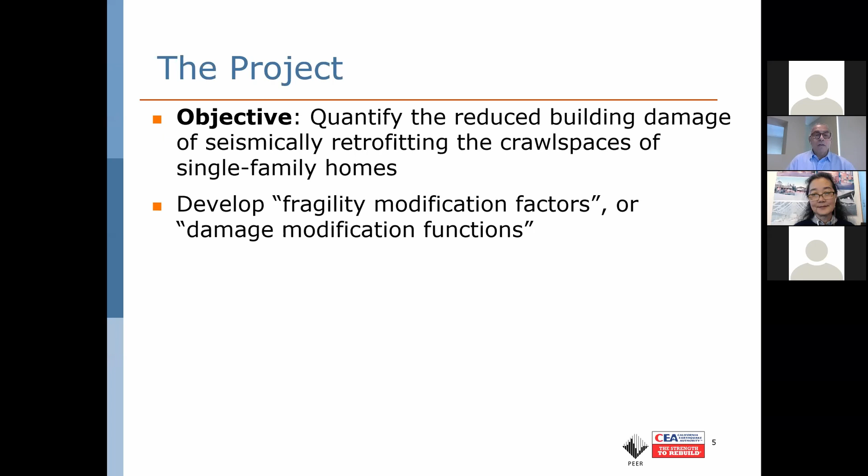The objective of the project, in a simple way, is: if you have a deficient single family home in terms of crawl space and cripple wall, and you retrofit that, how much are you really reducing the damage to your building? In other words, to get a little more scientific, what is the fragility modification factor or damage modification function? If you retrofit your deficient single family home in terms of cripple wall, what do you really gain after the earthquake in terms of damage?

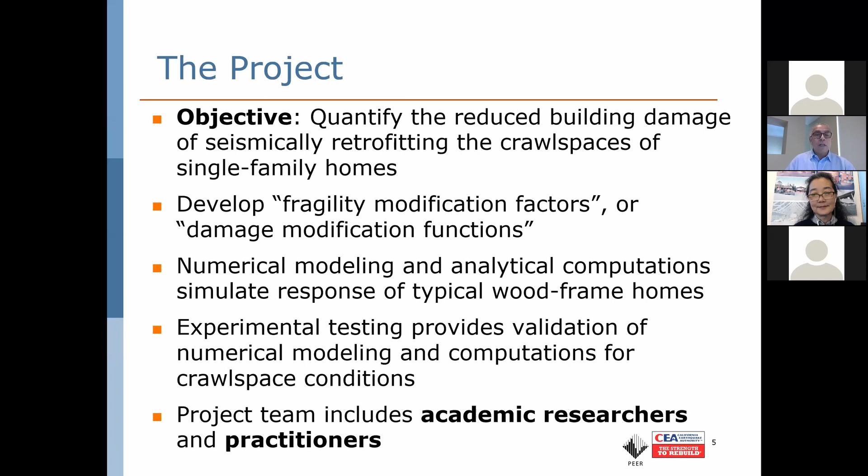The project involved, as you will see today and tomorrow, major numerical modeling and simulations by various groups, led by Stanford colleagues, and lots of experimental testing at different places to validate the simulation results, which I'm going to say a few words about, and you will hear more about later today.

This is the org chart of the project. You don't have to read it. The only thing I want to emphasize is that many people were involved, both at the junior researcher level, senior researcher level, as well as practitioners.

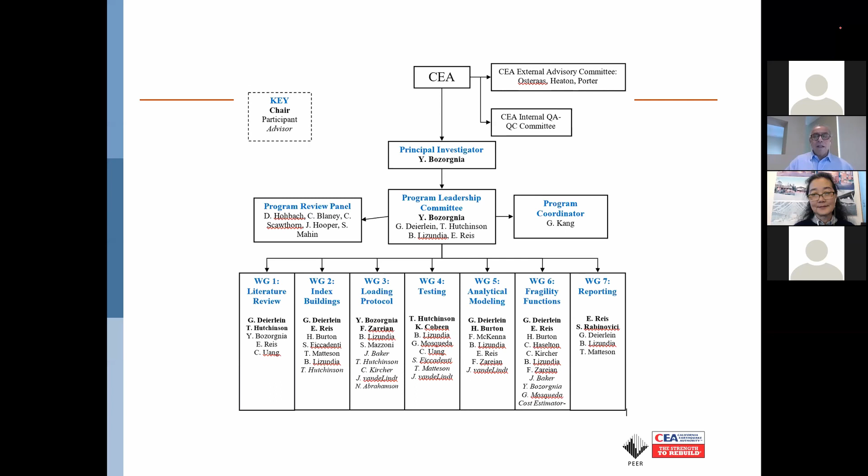Before I move on, there was a key member of our team, Professor Steve Mahin, who we started with, and unfortunately we lost him. He passed away during the proposal preparations as well as interviews and so on. Steve was always there, always supportive with many great ideas. We miss him.

So the project started after we were awarded. It took a little bit of time to get the contract in place by University of California and CEA. It officially started on October 17, 2016, and it will be done literally in a couple of weeks.

The project consists of 7 working groups or major tasks that I'm going to briefly mention. Working group 1 was a literature review. We started early on, and then gradually that was merged into other working groups, because each working group has had its own extensive literature review as part of their work. Then there was a working group on index buildings, because there are so many variations of cripple wall height, as well as other characteristics like 1-story, 2-story, and so on. So we needed a focused working group to come up with a manageable short list of the buildings we need to address. Then working group 3 was dealing with ground motion selection and scaling and loading protocol.

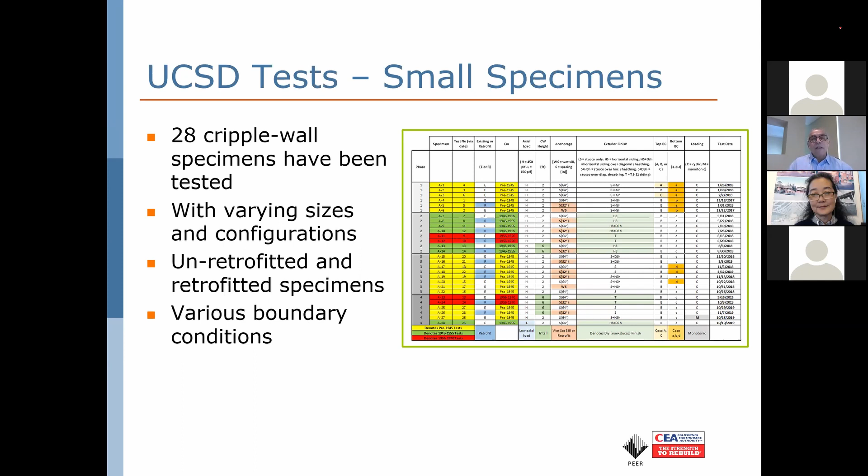Kelly Cobeen was in charge of experimental work at UC Berkeley. At San Diego, they did lots of specimens at a smaller scale. At Berkeley, they did larger specimens. This is just, again, you don't have to read the whole thing - I want to give you a big picture overview. They did lots of testing at San Diego, 28 cripple walls, retrofitted, unretrofitted, various boundary conditions. This is just one example; there are tens of examples like this.

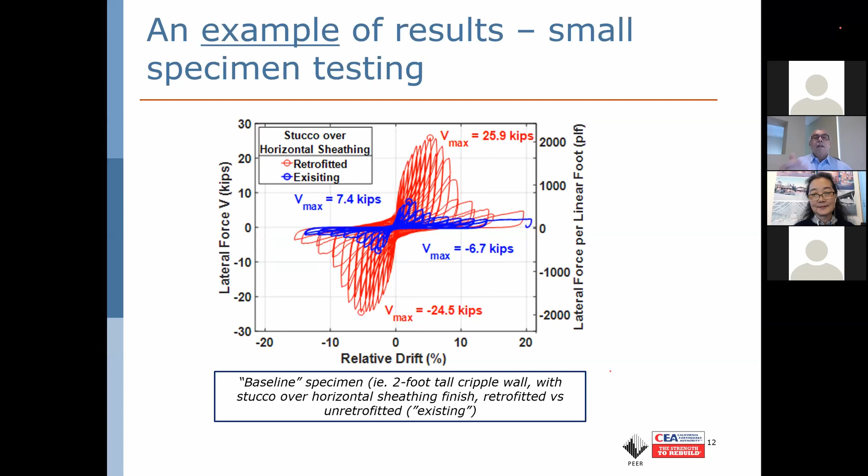Hysteretic loop - engineers love to see hysteretic loop. Vertical axis is lateral force, horizontal axis is drift. The red curves are the results of the retrofitted specimen. The blue curve is the result of unretrofitted, and obviously the capacity of the retrofitted specimen was much larger. In summary, retrofit works.

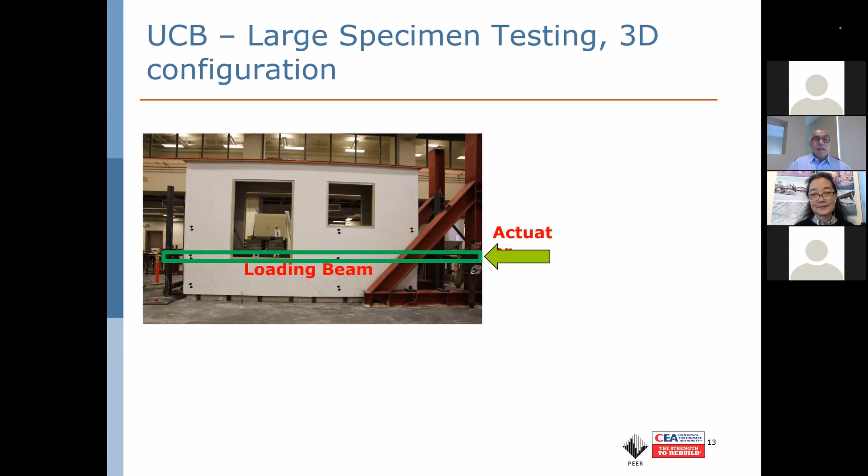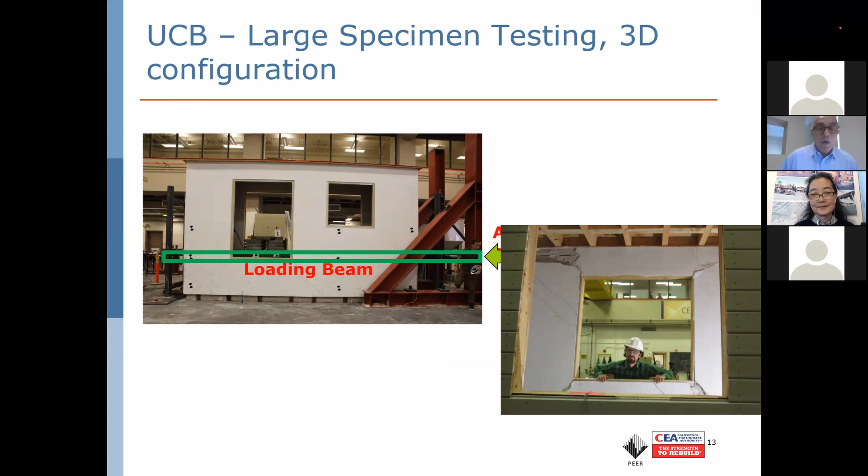So the same thing for larger specimens at UC Berkeley. This is what you see, one of the specimens. Just to see the size of that, you can see postdoctoral fellow Dave Walsh, who is behind the opening of the specimen. At Berkeley, also, they have lots of hysteretic loops. Again, this is only one example that you see, what is going on in a big picture. Again, you see the retrofitted case has larger capacity, much larger capacity than the unretrofitted existing case.

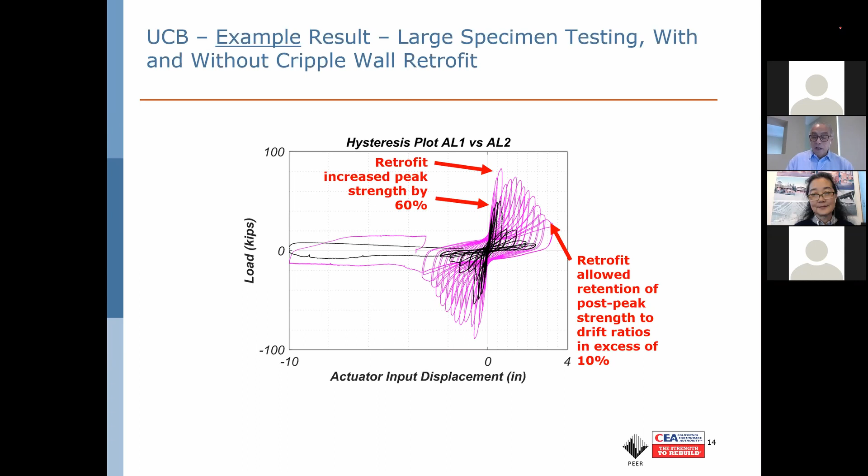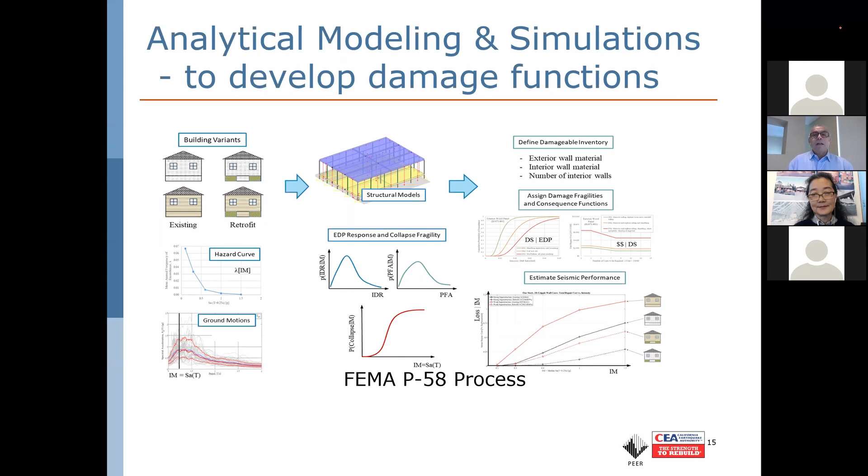Analytical modeling, extensive analytical modeling led by Stanford colleagues, and they are going to elaborate tomorrow especially. So they started with the buildings, 1 story, 2 story, different heights of the cripple wall and so on. They made the OpenSees models, then subjected the models to a lot of ground motions. They developed fragility functions, for retrofitted and unretrofitted cases. Lots of analysis they carried out - nearly 100,000 nonlinear dynamic analyses. If they wanted to do the analysis on a single computer, single CPU, it would take about 4 years to run. Obviously, they used high performance computing and ran the whole analysis in about 4.5 weeks.

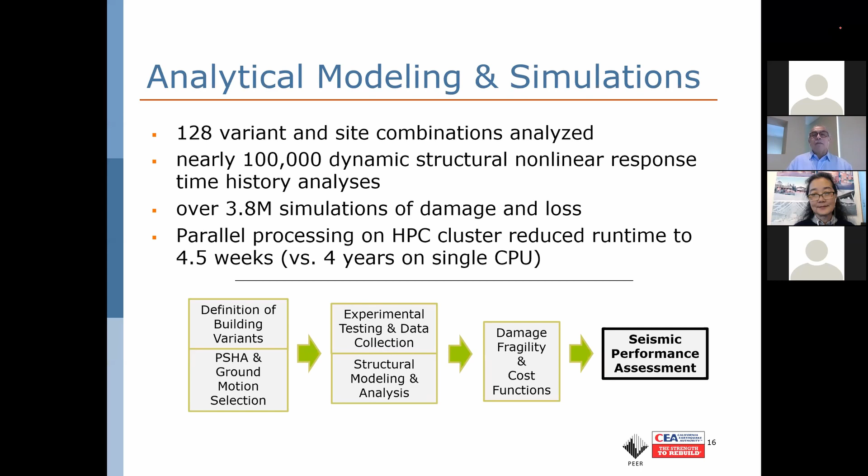And again, you're going to hear from them. The bottom line that you're going to hear after Grace and I are done, as well as tomorrow, is that the loss, if you don't do anything about your cripple wall deficient single family home, the expected loss is much, much more than if you do retrofit. You are going to hear more and see more details today and tomorrow.

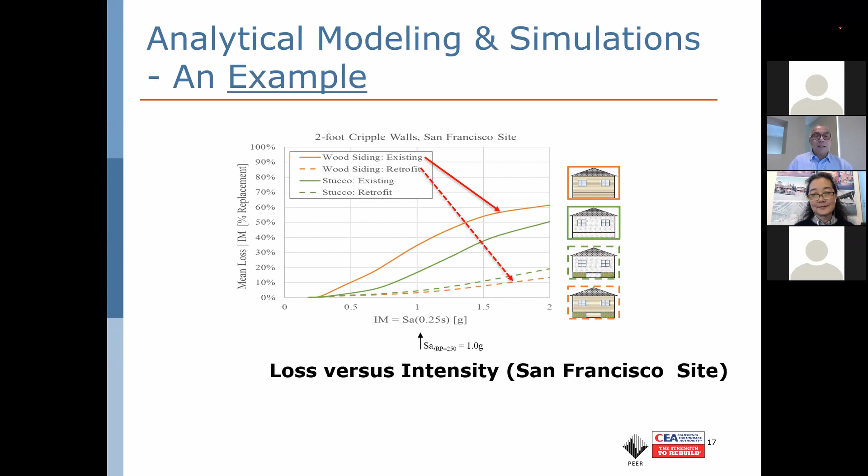So in summary, we are at really the final stage of the project. It's all about documentation now. We already drafted the first batch of reports. Grace is going to show you how many reports and so on are prepared. We went through the first cycle of the review, and now we are finalizing the reports.

It was a major multidisciplinary applied research project, and many people were involved, which is a good thing. We get real expertise from academia as well as the practicing community, and that is really the strength of the project. The project results, as Janiele mentioned in the morning, will be used by CEA and the insurance industry to take it to the next level - the effects on rates and financial matters and so on, which is really outside our scope. The project also, we believe, has created a platform for future research. All the data are saved, archived, and will be made available to the public, researchers, and the community, and I'm sure more research ideas and follow-up research will continue.

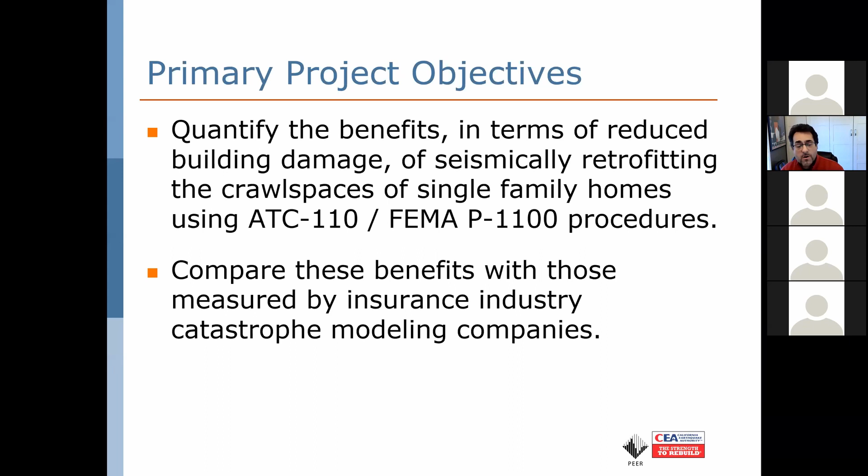Tomorrow I will speak more to the second objective, although I'll talk about some of the key findings today. So let's start with the benefit of retrofit.

As Yousef mentioned, there were 7 working groups working very hard on this project throughout the full 4 years of the project. So just a quick flow chart of how that worked: we wanted to make sure we were using the latest science that was out there, but we were also taking advantage of the many studies that have been done over time about the performance of single-family homes.

So we began the whole project with a search on what's out there - what tests have been done, what studies have been done, what kind of empirical data and testing data was available. We didn't want to duplicate anything that we thought was good, but we also wanted to fill in gaps or improve what we thought might be obsolete or missing.

The second item was to develop a set of index buildings, and I'll talk about that in more detail in a couple slides. We had to understand what the different combinations of housing styles, single-family housing styles, were prevalent in California. You can walk down most streets or cities and see literally hundreds of different types of houses. So we had to try and narrow down the types of houses, the key parameters in a house that affected its seismic performance. You'll hear more about this after Sharyl and I speak.

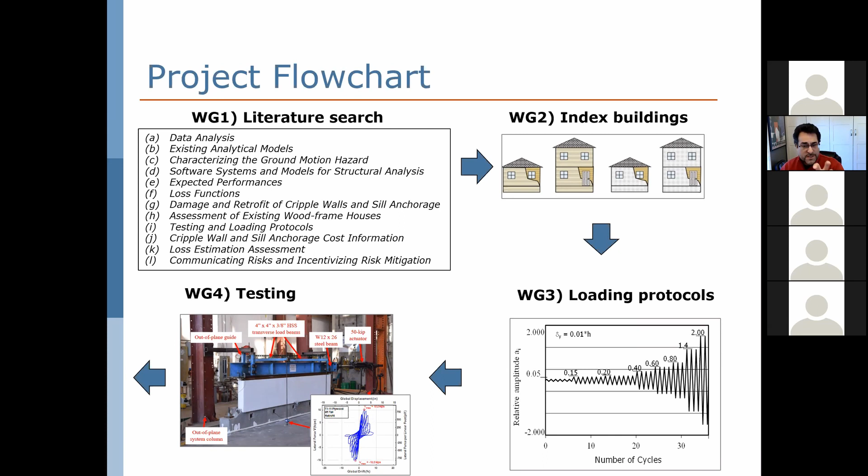Those loading protocols were used, as Yousef mentioned, in the testing program, which was a fascinating effort - Tara and Kelly will blow you away with all the amazing stuff that they and Brandon Schiller did as part of this project. All of this was here to get us to the point where we could actually start building models of the building. Greg Deierlein and Dave Welch will talk tomorrow about how they took past research plus the testing information and the ground motion information to create a model of these buildings that estimated their damage as a function of ground motion.

So that was working group 5. Working group 6 was divided into several different parts, if you will.

A very interesting part, and Bret Lizundia will talk about this tomorrow, is we wanted to get even better information on damage than what was sort of in the industry now. A lot of what is in the industry now might be older empirical data or data from estimates from engineers.

But we wanted to sort of go right to the horse's mouth, if you get my drift, and meet with claims adjusters, those folks that work for the insurance company that are going to be the ones that really quantify how much they're going to give you to repair the building, right?

Brett will talk about the whole effort that he and his colleagues went through to develop this improved damage information with the help of these adjusters.

And then with all that, with the loss model, or with the analytical modeling and the information from the claims adjusters, these loss models were developed. So this ultimately is the main deliverable to CEA, which is, if you have an existing house of this configuration, what are its likely damage and loss characteristics in an earthquake?

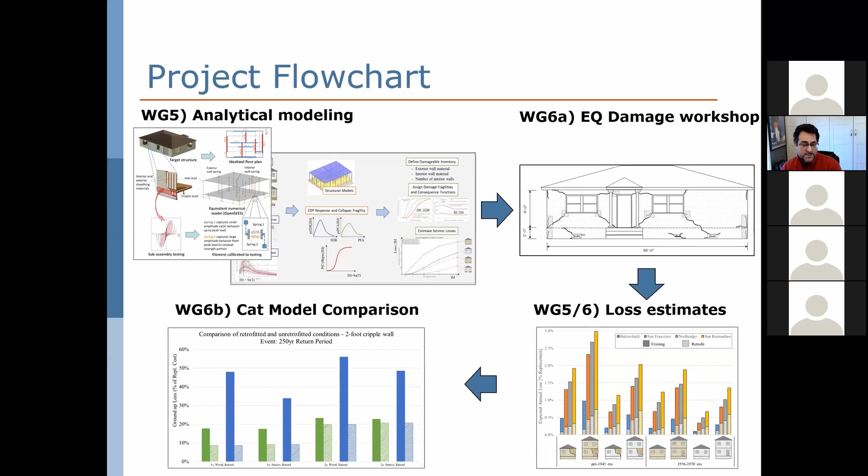Okay, so let's jump into the development of the index buildings. This was an important consideration. This took us quite a while in the beginning of the project.

And again, as I said, you can go around and see hundreds and hundreds of different types of houses, but we couldn't simply model every possible combination of homes. So as part of this study, we wanted to focus on what was manageable for the project team.

First and foremost, we have to talk about houses that are characteristic to California, right? CEA is a California Earthquake Authority, so there's a lot of construction of brick houses in other parts of the country. We don't really construct brick houses here. So we wanted to identify those characteristics of homes that were common in California, because those are the kinds of homes for which these retrofits, these brace and bolt retrofits, would be used.

But we also understand that if the overriding goal of this effort is to help insurers calculate risk and premiums based on the characteristics of the home, these characteristics had to be readily available. When you have an underwriter, sometimes an underwriter doesn't even come to your house to give you a quote. But if an underwriter comes to your house, there's only a few things that they're going to look at.

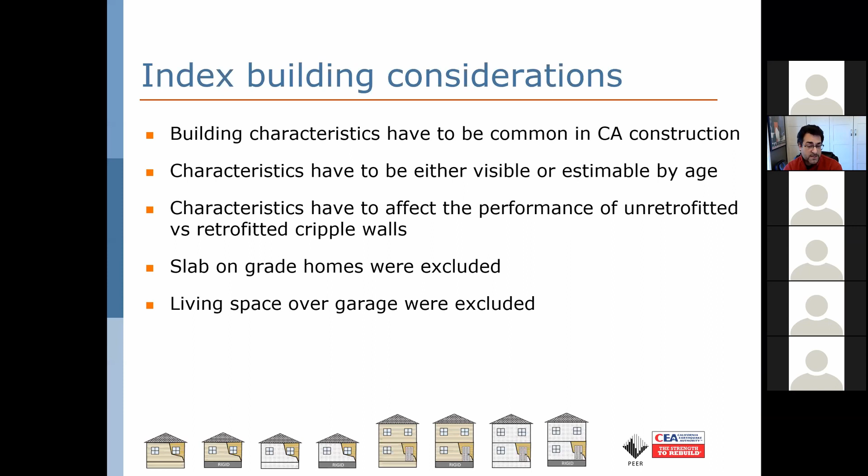I wanted to note that because it's a major issue that a lot of people think about. It certainly will have an impact on the performance of the home, and we hope that'll be left for another day. We felt that including that as a characteristic made the analytical modeling that much more difficult because of the nonlinear performance of those kinds of elements.

Okay, so we ultimately came up with a list of building variants, we call them. These were the characteristics of the building in different categories that we would then combine to create this list of index buildings. The most important are probably the first three: the age of the house. The age of the house really defines some of the main styles of construction in California.

Pre-World War II, houses were built with plaster. It wasn't always clear whether the houses were bolted to the foundation, sometimes they were, sometimes they weren't. But it really was characterized by that sort of heavier style of plaster framing. On the outside, you could still have wood siding or stucco.

In the 1945 to 55 era, we started transitioning from plaster to drywall, after the war. So you had houses with both, basically. And then after 1955, we primarily used drywall in standard housing construction.

Plus, you also had houses that were typically braced or bolted to the foundation, although they could still have unbraced cripple walls. And then after 1970 or so, you started to use more plywood on the outside of the house, extending down from the first floor into the cripple wall and down to the foundation. So that really is a house that is, at least nominally, braced, has a braced cripple wall.

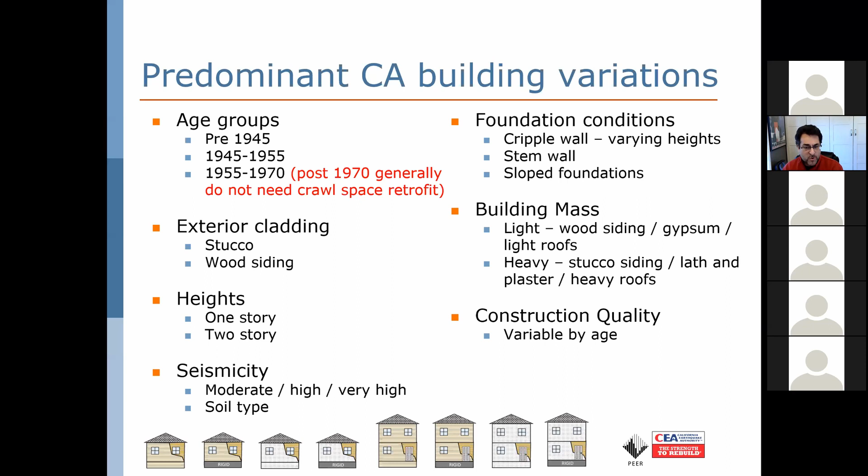And then finally, something that we sort of attempted to quantify, although it was really more through the testing than a lot of specific research on this, is construction quality. Obviously, older homes are going to have more deterioration and that kind of thing, and it was something we could estimate, but we couldn't quantify specifically.

Okay, so I have to credit Dave Walsh for all of the very cool looking icons of houses you will see throughout this project. We use these throughout to represent the different styles of homes: 1-story, 2-story, stucco cladding, wood cladding, an underlayment or a finish of lath and plaster. You see the sort of cutaway there on the house.

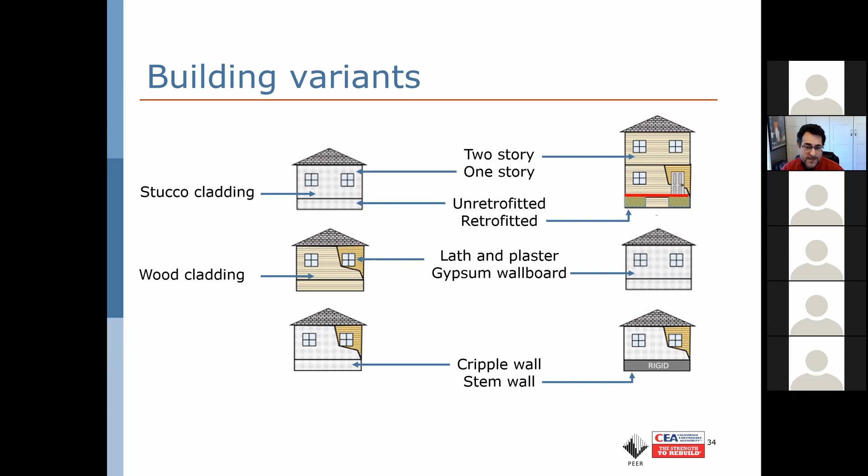Houses with cripple walls, which are these wood walls between the foundation and the first floor, and stem walls, where the concrete goes all the way up to the first floor. So you will see these various combinations. We have a retrofitted condition and an unretrofitted condition. And so thank Dave Walsh for that.

Yousef showed you this in the beginning during his talk. Let me just go into this in a little bit more detail.

The key output of the project that will ultimately be used by the insurance industry are these things called vulnerability functions, sometimes called damage functions. They represent the amount of loss, earthquake repair costs incurred, as a function of how severe the ground motion is. A bigger earthquake has larger ground motion, and larger ground motion leads to more damage.

You'll see this graph on the left here, using these icons: existing homes and retrofitted homes, wood siding and stucco siding. There's a big difference in the performance of buildings depending on the siding, and certainly if they're retrofitted or not. For the same ground motion, say 1G, 100% of gravity, in the unretrofitted case the losses range from 30 to 50% of the replacement cost of the building. But in the retrofitted case, it's more like 6 or 7%. That obviously has a big impact on the performance, and ultimately on what the insurance companies pay out, presumably an impact on the premiums.

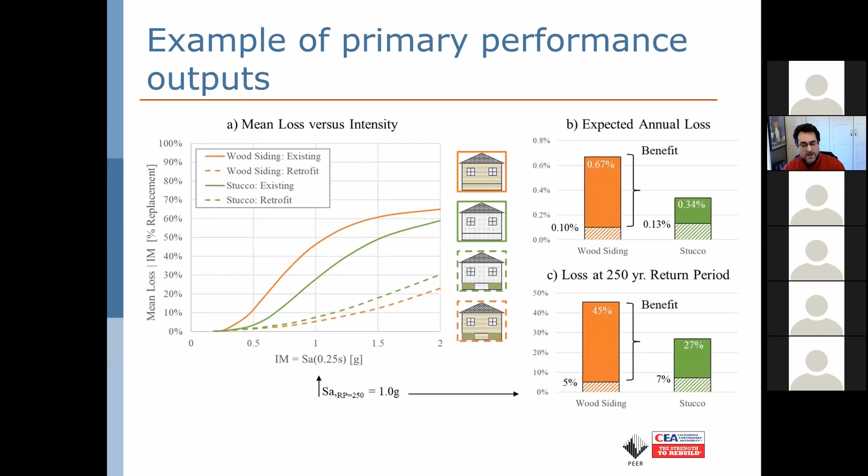When you invest in the stock market or a mutual fund, Schwab will tell you what the annual return on investment is for that stock. That means that if you hold the stock or mutual fund for many years, on average every year it makes 3% or 5%. That's how insurance companies think about pricing policies: on average for buildings like this, how much am I going to pay out every year? Even though in many years there'll be no payout, and in one year when there's an earthquake there might be a big payout. This expected annual loss is a way of amortizing losses over time that is very useful for financial reasons.

Okay, so let's get into some of the results.

What you see here, and we have many of these figures, they're all accessible, as Grace said, in the various reports. Here are 4 different places where we located the buildings: Bakersfield, San Francisco, Northridge, and San Bernardino. On the left, a group of pre-1945 houses, and on the right, a group of 1956 to 1970 houses. The 45 to 55 houses have losses essentially about the average of those. You see different bars for the retrofitted condition, the hashed bars, and the unretrofitted, existing condition, the solid bars. You can see the difference in losses based on whether the house is 1 or 2 stories, stucco or wood siding, and gypsum wallboard in later years versus lath and plaster.

To zoom in on one example, let's take these 3 locations of high seismicity: San Francisco, Northridge, and San Bernardino. You can see that for even just a 1-story home, unretrofitted, with lath and plaster pre-1945, you're upwards of around 60% loss in the big one, this 250-year event. That means an earthquake that large on average will cause a loss, a repair cost equal to about 60% of the price of the house, which is pretty significant. But if you retrofit it, that average is only about 13%. There's a huge difference in the unretrofitted versus retrofitted condition. You can march along and look at those differences for these different styles of houses.

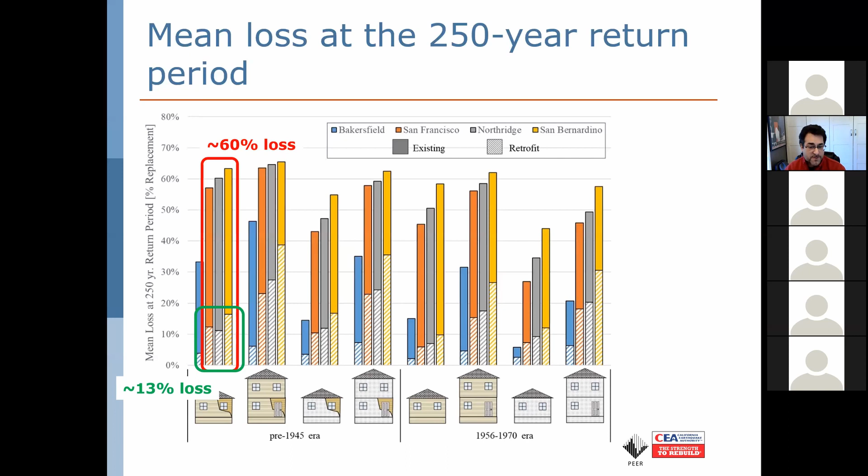So to give you an idea of what this kind of savings is: if you have a 1-story home that costs about $240,000 to replace, a 60% loss is $144,000, a 13% loss is $31,000. So the savings on that style of home would be on the order of about $113,000 in that event. That's obviously quite significant.

The typical cost of a brace and bolt retrofit, and Sharyl will talk a little bit about this, is like $3,000 to $7,000 depending on where you live. So if you're really trying to protect yourself against the big one, there's a high return on that investment, and you can see that across the board, it is that way.

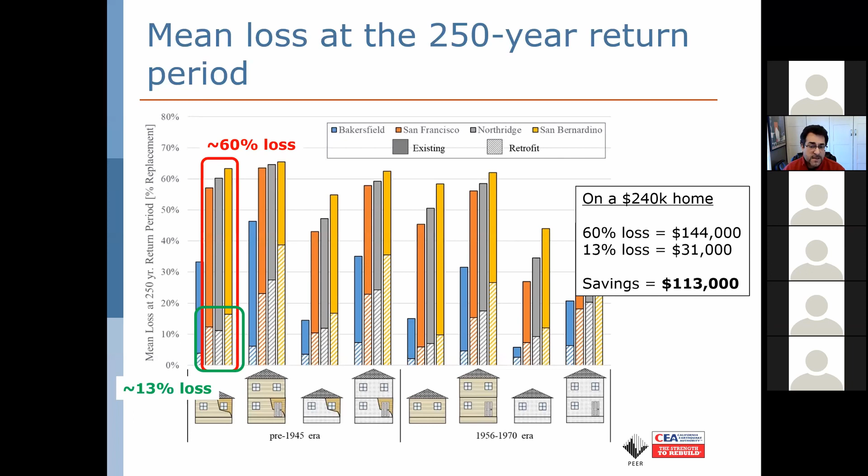1-story house, well, I'll go into some of the key findings in a second. We also looked at the average annual loss. Again, this is sort of the amortized return you get every year. Obviously we don't have an earthquake every year, but if you hold the house for 30 or 50 years, on average, this is the benefit you will get.

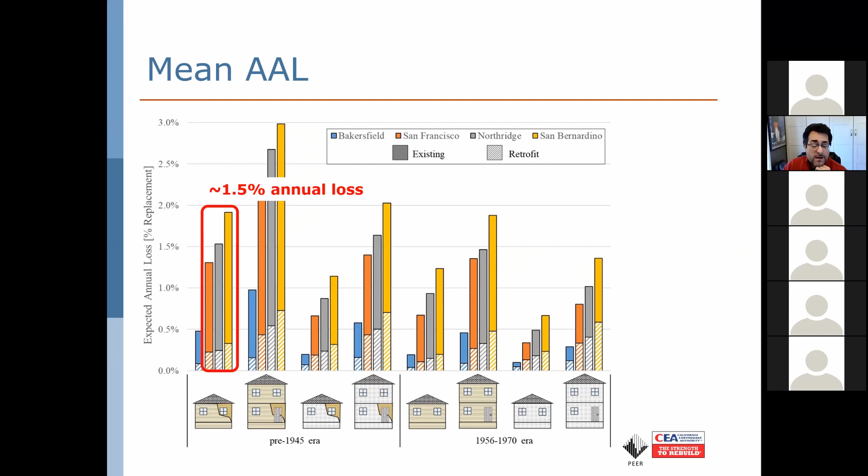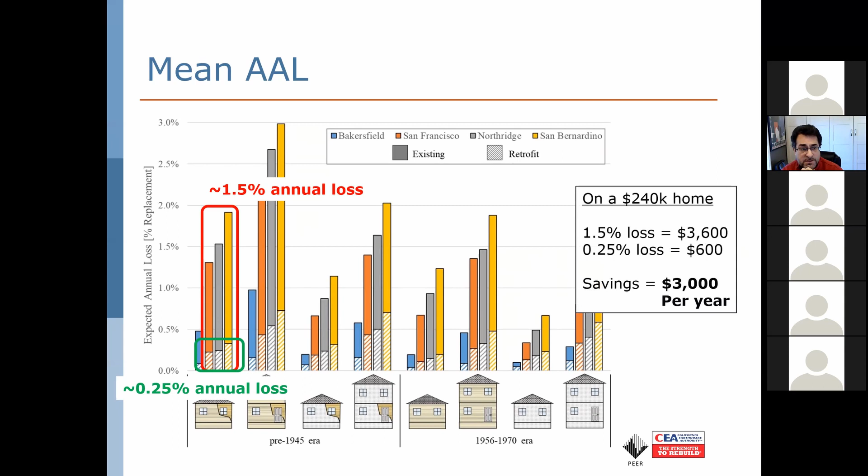For these same 3 houses in an unretrofitted condition, a 1-story house with lath and plaster, an older home, has an average annual loss of about 1.5%, and for a retrofitted condition, it's about 1/4%. What does that mean? Well, if you have that same $240,000 house and 1.5% loss every year, that means averaged over the life of the home, you're having about $3,600 of loss per year in your unretrofitted home. If you go down to 1/4%, that's only $600. So you can think of it as a savings, just like a return on your stock or your bond or your mutual fund portfolio, of about $3,000 per year by retrofitting your home.

And again, if the typical cost to retrofit a home is $3,000 to $7,000, then you can see, depending on where you live and depending on the style of your home, that return is achieved pretty quickly, in just a short period of time, right? So these are the kinds of things that we noticed coming out of this project.

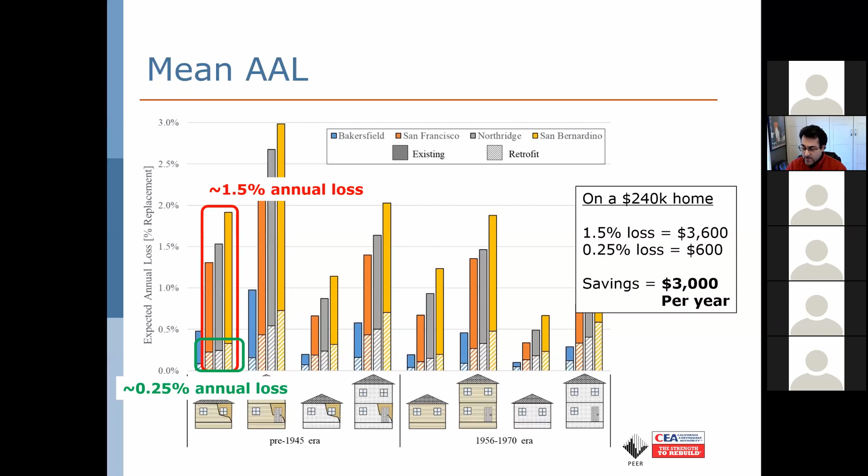Key findings: wood-sided cripple walls are more susceptible to damage than stucco-sided walls. Now, stucco is a heavier material and mass works against us in earthquakes, but stucco is also much stronger than typical wood siding. Wood siding typically is just horizontal boards placed directly against the studs, maybe with some paper in between for weatherproofing, and those are very weak. There's not a lot of lateral strength with horizontally sided wood siding. So what we saw is that between an equivalent wood-sided house and stucco-sided house, the stucco one is going to perform much better. But once you retrofit by adding plywood, the plywood strength is much greater than the horizontal sheathing or the stucco, so once you retrofit the homes, you have relatively similar performance.

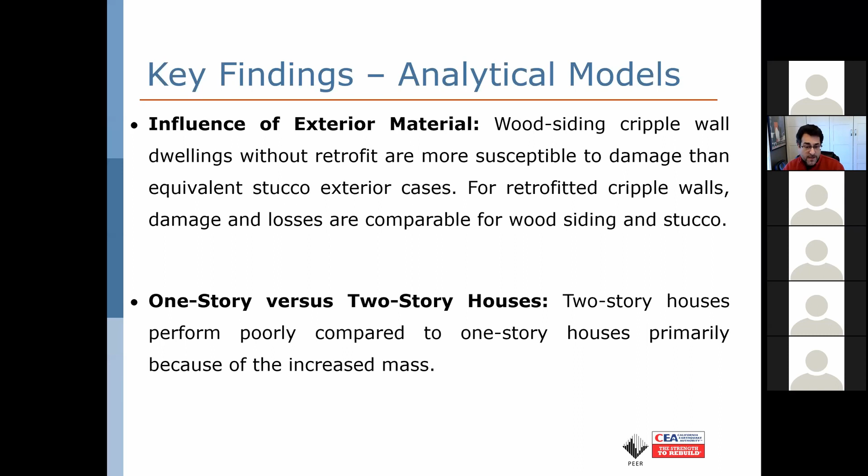We also found that 2-story homes do significantly worse than 1-story homes. This is not surprising, and it's because of the mass. You essentially have double the mass on what really ends up being, in an older home, the same cripple wall. It isn't as if they used 2 layers of wood sheathing in a 2-story home to make it twice as strong, so you essentially have twice the mass on the same strength cripple wall. Obviously they're going to perform quite a bit worse, so similarly, when you improve those houses by retrofitting them, the benefit is that much greater.

We did find an interesting and significant difference between the older homes and the newer homes in terms of interior walls and their finished material. Plaster on wood lath was the norm before World War II, and it transitioned from '45 to '55 until drywall typically became the norm. Plaster is very heavy, so it does add mass, which again works against us, but it is also stronger, similar to stucco — it's almost a cementitious type of material, so it adds strength as well as mass. But in this case, we found that it's much more costly to repair plaster. It's more brittle than drywall, and so houses with plaster, all other things being equal, are going to perform worse than houses with drywall.

Naturally, as you'd expect, the higher the seismicity, the higher the losses in an unretrofitted home, and of course, the bigger the benefit.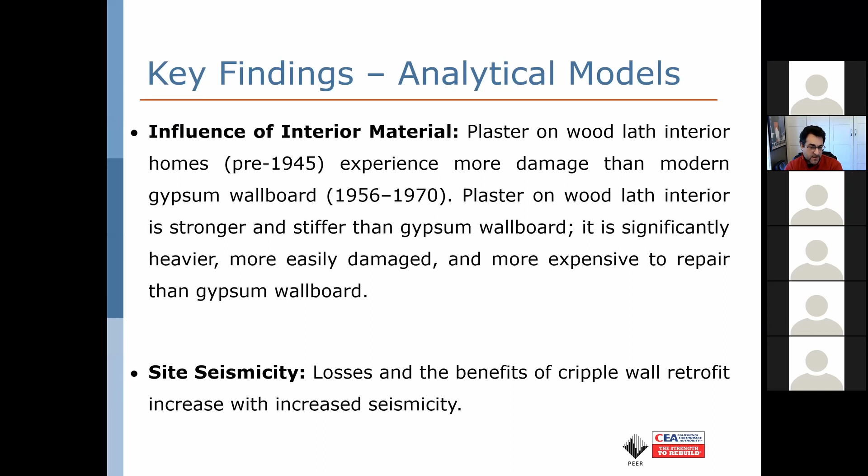Before we really started to do more engineering on homes, you didn't necessarily design a home that much differently in a place like Bakersfield than you would in San Francisco, in terms of how much structural sheathing you'd add or what the nailing pattern would be. So really, you kept the capacity the same, but the demand just went up as you get to higher seismicity.

We did find a very big difference between stem wall homes and cripple wall homes. The stem wall homes, remember, the concrete foundation comes all the way up to the underside of the first floor, whereas the cripple wall homes have that 2, 4, or 6 feet of wood unbraced wall. The houses perform very differently. The stem wall houses perform very well because there was no cripple wall to fail. The only failure mode was if the house started to slide off its foundation because the bolting wasn't good enough, whereas with the cripple wall homes, they rack over and they're very weak.

So similarly, you get less benefit for retrofitting a stem wall home, where you just need to add bolting, and that's it basically, or maybe some clipping of the joist to the sill, versus the benefit you get by bracing a cripple wall.

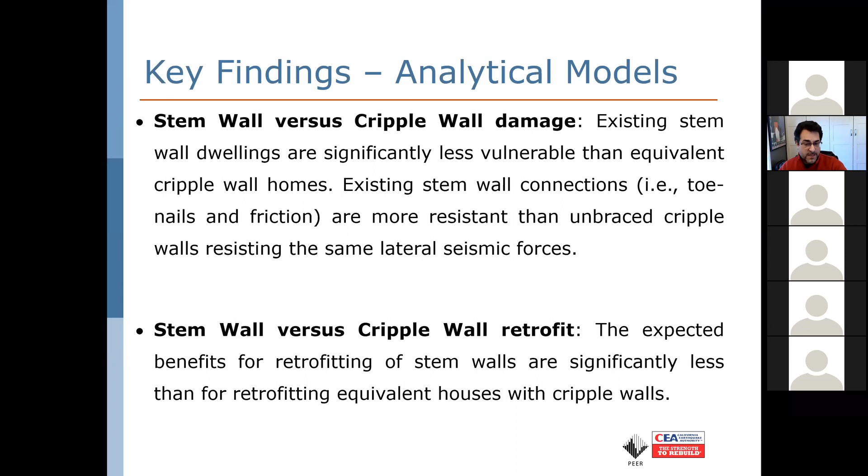Okay, so let me move into talking about the catastrophe modeler comparison. I'm going to spend a lot more time on this tomorrow, so I'll just go into a little bit of it today.

So the three biggest catastrophe modelers out there that work with the insurance industry are AIR Worldwide, CoreLogic, which used to be EQECAT, and RMS. I want to start by saying we all appreciated on this project how helpful they were. We know it's a challenge sometimes, because they have intellectual property and they compete with each other, but honestly they were all more than generous with their time and with their positive comments and feedback about what we were doing. So I want to thank those folks.

The goal here was to compare the results we got with similar types of houses that would be configured in these loss models. We had to do it in a way that protected their intellectual property, because obviously PEER is publishing everything, and we wanted to respect the need to maintain some confidentiality. We'll go into that tomorrow, I won't go into that today.

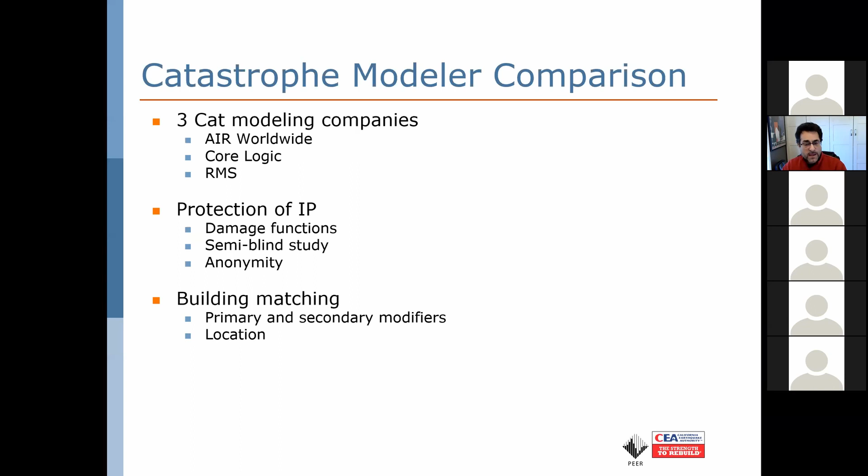A little bit about how we did that: ultimately we had to be able to match at least a subset of the buildings we evaluated with a set of the buildings that the modelers would have. By making that comparison, our goal was to increase the confidence of the modelers that the work we were doing was compatible with the way they approach loss modeling. So we ultimately chose 48 of the buildings to do a comparison. These were buildings where we could match our characteristics with the characteristics used by all three of the modeling companies.

We looked at 3 different age groups, which didn't line up precisely with all of the modelers. Each one has their own sort of age group that might be a little different, but they were pretty close. We also matched cladding style—stucco and wood—1 and 2 story heights, cripple wall or stem wall condition, and the unretrofitted or retrofitted case.

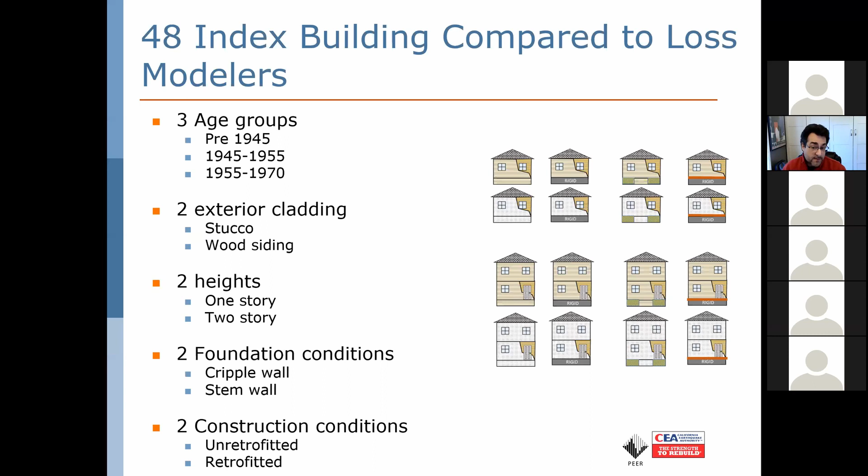So let me give you some of the comparisons here. I'll go into this in more detail tomorrow. The graph you see here, and the next graph, basically show 1-story homes and 2-story homes with wood and stucco. These are all on raised foundations, so cripple walls, not a stem wall. The green bars represent the average of the 3 modelers' results, and the blue bars represent the CEA results.

The solid bars are the unretrofitted case, and the hashed bars are the retrofitted case. The first thing that should strike you is that the solid blue bars are much larger than the solid green bars. So what that means is, in all cases, the PEER CEA project predicted higher damage to buildings in the unretrofitted case than did the modelers on average. You can see for a 1-story raised foundation with wood, CEA PEER is predicting closer to 48-50% damage, whereas the average of the modelers is under 20%. And that only gets more significant with the 2-story wood condition.

But the second thing you'll notice is the retrofit condition—excuse me, this is not the right slide, I'd asked for this slide to be replaced, but it's close. What you're seeing here is that for the retrofitted condition, the modeler and the PEER numbers are close, but they're not exactly the same.

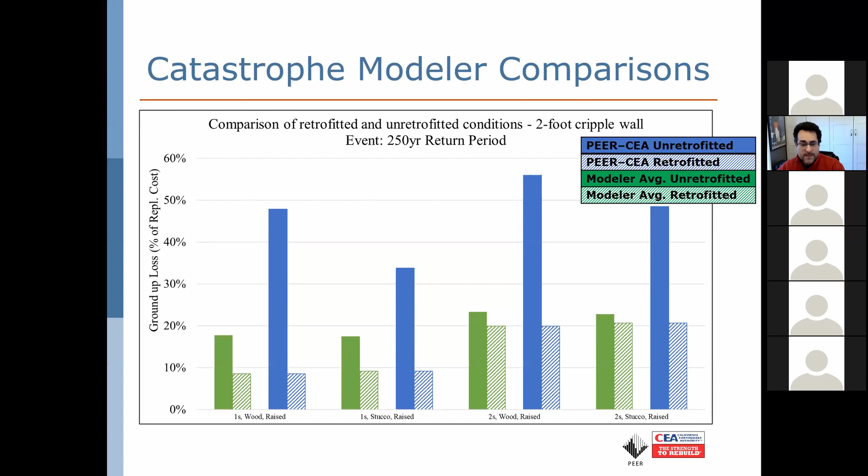The difference in performance between the retrofitted conditions is much less, and I'll provide an updated slide tomorrow. But the key difference is you have a lot more damage in the unretrofitted condition, CEA peer compared to the loss modelers, and then you have much more similar damage in the retrofitted condition.

So the same thing goes with average annual loss. This is sort of the amortized return, if you will, looking at the loss over many years. This is what the insurance companies use. You can see a very large difference between the loss, the blue bar, which is the peer CEA unretrofitted condition, and the green bar, which is the loss modeler unretrofitted condition.

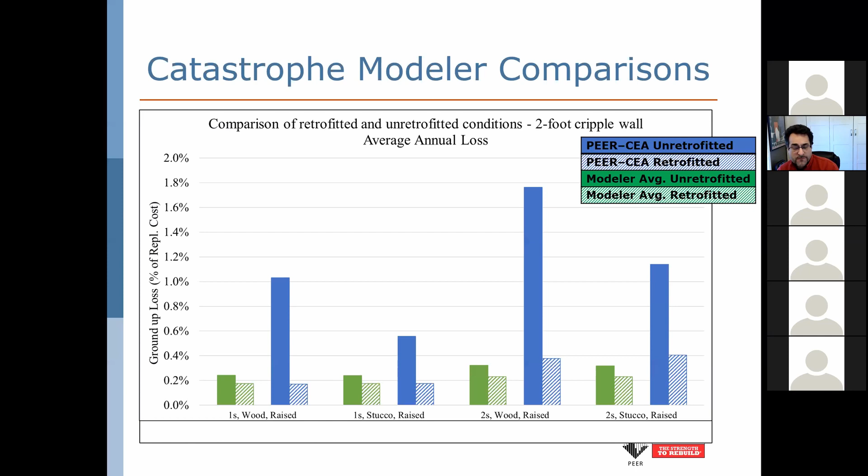We're predicting a lot more damage because we're really finding, in particular in the wood houses, that the wood cripple walls really, really are weak. The stucco cripple walls do much better, especially in the 1-story condition. And then again, not a lot of difference, some difference in the retrofitted case, but they compare much better.

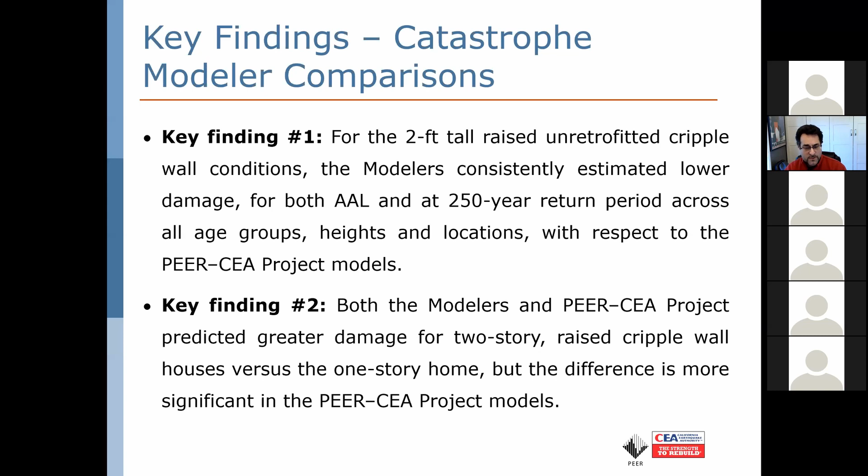So CEA, the PEER CEA project, is predicting significantly higher levels of damage for unretrofitted cripple wall conditions. We both predicted, the modelers and the project, larger damage for 2-story homes versus 1-story homes, and that has to do with the mass. But for us, we predicted a more significant difference in damage than the 1-story homes. That extra mass really makes a difference on your unbraced cripple walls.

For the stem walls, on the other hand, it was sort of reversed. We found very little damage to houses, relatively speaking, when they had stem walls, because even if the house wasn't really well bolted to the foundation, you still typically had a condition where the sill plate was set into the wet concrete as the foundation was being poured, with maybe some spikes in there, if not bolts. So you still actually had a very strong connection between the sill plate and the stem and the foundation wall.

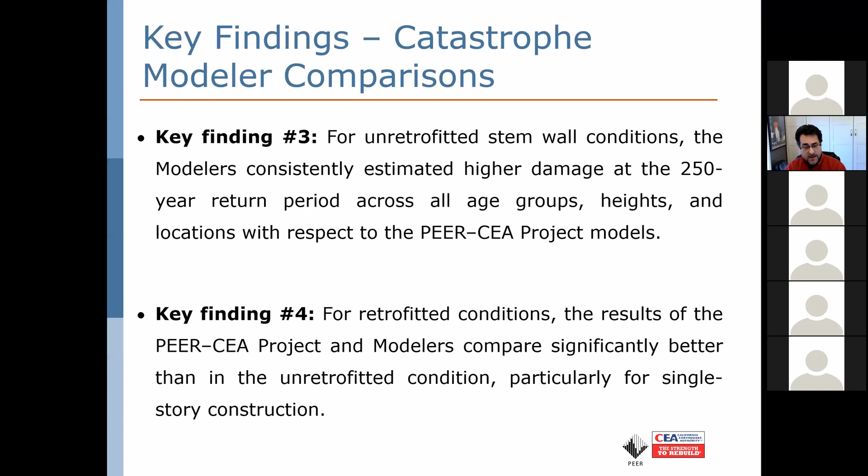So the PEER–CEA project predicted lower damage than what was shown in the modelers. That said, when we retrofitted the buildings, there was a much better comparison, especially for single-family homes, for 1-story homes. We found that the loss modelers and the PEER–CEA project results were much more comparable, within 20–30% typically.

An interesting thing that we have an explanation for, but it's something that can't always be well captured in the analytics - sometimes you need the empirical data - is that the PEER–CEA project showed consistent improvement with age. The worst performing buildings, because they typically had heavy lath and plaster, were the older pre-1945 buildings, plus they didn't have really good bolting of the foundation. As you went into 1945 to 55 and started transitioning to some drywall, the performance improved. And when you got to 1955 to 1970 and had pretty much all drywall, the conditions improved further. So we saw constant improvement with age.

But interestingly, the modelers generally show a dip in performance between 1955 and 1970, and then a rise again - a dip in damage between 45 and 55, and then a rise in damage between 55 and 70. So the pre-45 houses are generally poor, they get better in 1945 to 55, but then they get worse again in 1955 to 70.

I think one of the reasons for that may be just the way construction practices were going in the state - less union labor after the war, after the mid-50s. So there may have been things that empirically would come out in terms of damage results from insurance, but don't necessarily show up in our analytical models.

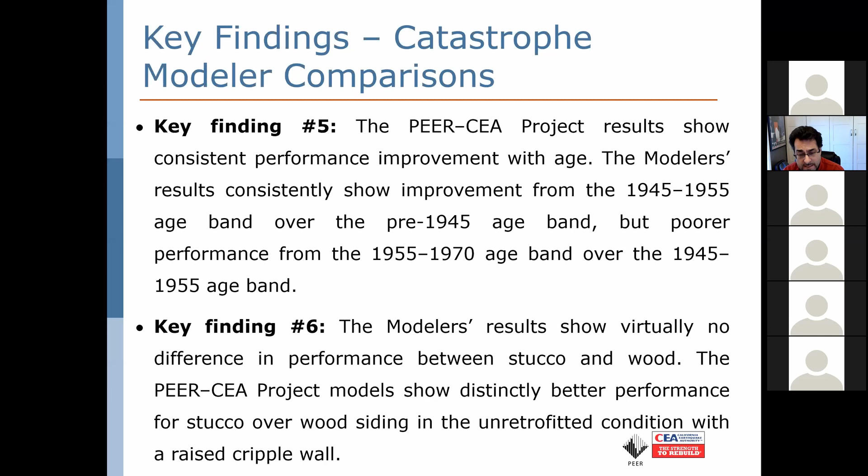The PEER project showed significantly better performance for stucco over wood in the unretrofitted condition, at least, and that's because stucco just has a lot of strength. When you're talking about that 2-foot unbraced cripple wall, having some sort of strength down there really does matter, and that was less evident in the insurance model results. So those are the key findings.

I wanted to show one last slide. As part of this project, we also did a pretty quick comparison with HAZUS. HAZUS is one of the standard regional catastrophe, publicly available catastrophe modeling software programs, and a lot of government officials use HAZUS to make estimates of regional damage.

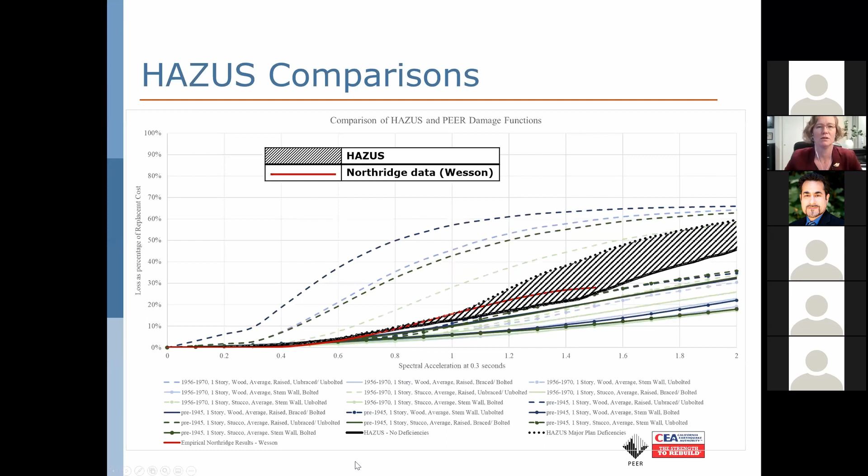One aim of this project from the beginning was to create two final reports. One was focused on reaching a broader audience - it's also a summary of the entire project, but one that's meant to translate the information, primarily the findings not quite as much the methods, into a more accessible, shorter, absorbable length with more standard, plain use language and less depth, only at the depth necessary for these wider audiences.

So what I'm going to be talking about in the next 15 minutes or so is the aims and key messages as they're communicated in that report, which is 6 pages, not the 1,000 pages of documentation, and hopefully also a product, an output of this report that you will be able to use as you take the results of this study back to your own work.

That report, the stakeholder findings report, is going to be available soon. It's under final review and formatting right now, so we anticipate that being available for you very soon.

As we all know, the audience for the findings of a research study is actually almost never only the scientists and researchers who are experts in that field. When CEA commissions research, it does so in part to answer questions that are critical to its own operations and sound government. So we have to consider that CEA has many uses for this study, including using it to communicate with less technical audiences. That's a very important stakeholder, even though it's kind of internal to the project.

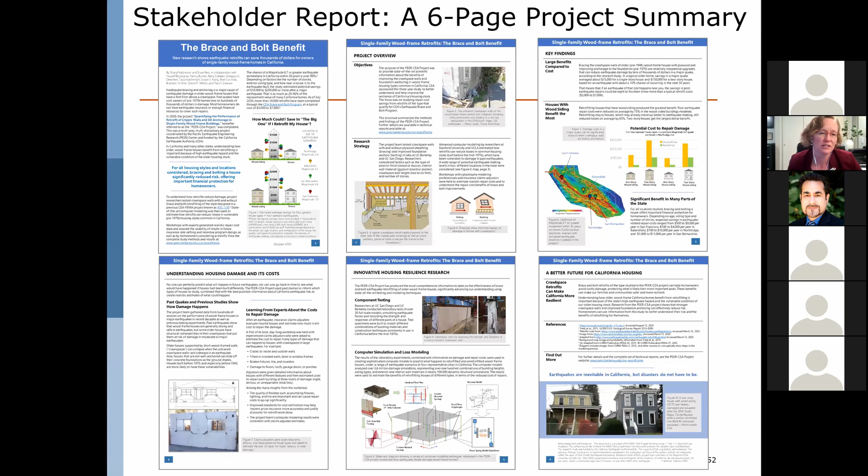It still covers some technical ground, describing the methods of the project in a way that I wouldn't consider targeting the public. But it does contain messages in a form that could be further refined into educational, marketing, or media messages, as well as supporting justifications for future research.

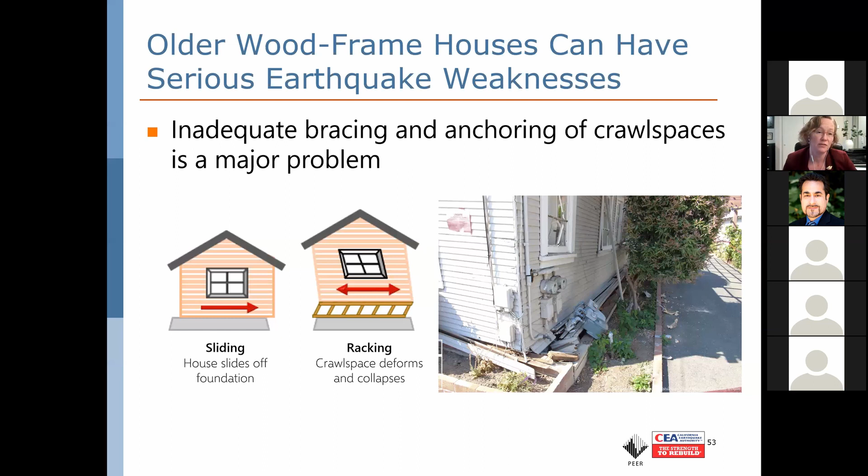The first key message of the PEER CEA project is the reason for the project: earthquakes can seriously damage single-family wood frame houses when they lack bracing and anchoring to the crawl space. What this study adds is advanced information about how crawl space wall weaknesses lead to damage and at what cost. There are so many older houses in California that might have these weaknesses - we don't know how many, and we need to understand the consequences for owners and what they can do about it. A final point is that repair costs need to be understood in both retrofit and unretrofit conditions, so we can see the savings owners benefit from if they invest in this kind of upgrade.

Key message number 2 is that earthquake damage in a wood frame house can add up to tens to hundreds of thousands of dollars, and many homeowners cannot visually appreciate the many different aspects of their house that will be damaged. The PEER CEA project represents a big step forward in documenting the costs of the many types of damage and how that damage might differ in houses with different features. In reality, it really all adds up. The Claims Adjuster Workshop, discussed more tomorrow, provides some of the best and most up-to-date information demonstrating the breakdown of repair costs among these different elements and how claims adjusters make their estimates.

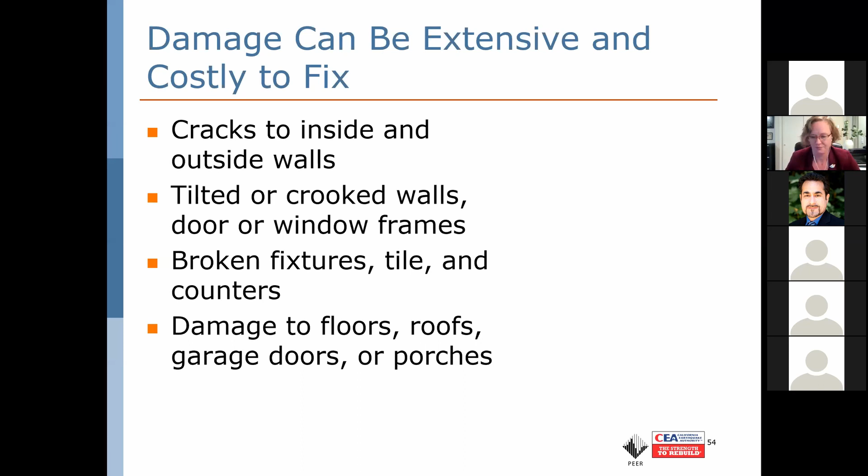We've started the process - I hope it's helpful to CEA - advancing the branding of the brace and bolt retrofit by calling this study the Stakeholder Report: The Brace and Bolt Benefit. Bracing and bolting a house significantly reduces earthquake risk, often providing important financial protection for what may be a homeowner's most important asset. Repair costs avoided was the sole study outcome. In other words, other benefits like improved safety, the ability to stay in one's home, avoiding temporary loss of use costs, and other life disruption - those would be benefits not studied here, on top of the brace and bolt benefits we've been able to study and articulate.

So how much can someone save in the 'big one' if they retrofit their house? Let's first look at one-story houses. For this prototypical generic stucco house, a brace and bolt retrofit can provide about $15,000 to $85,000 in savings on repair costs. For a wood-sided house, the savings average $50,000 to $115,000 in repair costs. Those are averages, and they vary by the simulated location of the earthquakes under study and the intensity of the earthquake over time. But we found these findings to be robust across earthquakes of this size and significance, and across these many different locations in the state. The key message: savings from retrofitting can be large, and are generally larger in wood-sided homes.

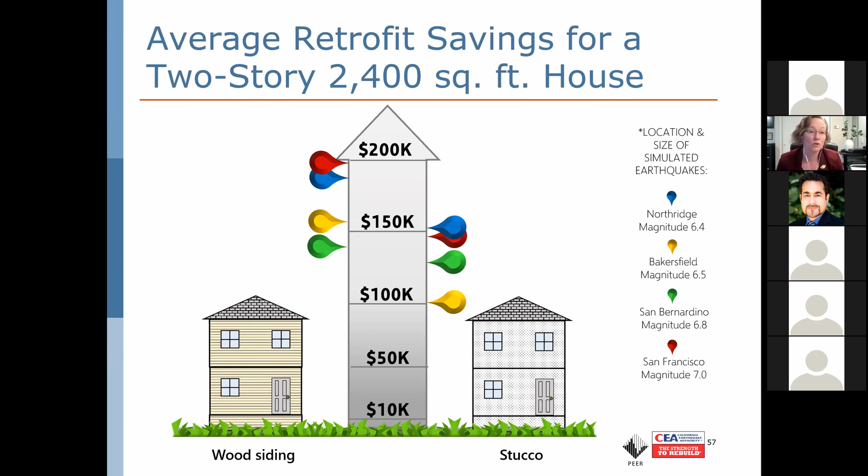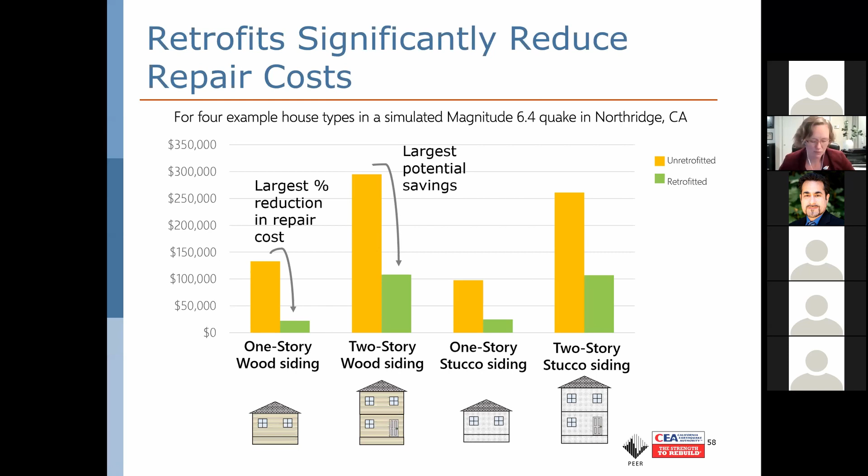This diagram is another way of showing repair cost savings from investing in a retrofit, taking just one earthquake location in Northridge, California - not the 1994 earthquake scenario or data, but a future quake in that location as simulated in the study. We see the largest benefits for wood-sided homes again here, including the largest percent reduction in repair costs of 84% for the one-story wood frame home, and still the largest potential dollar saving for the two-story wood-sided home. The brace and bolt benefit is on average, in terms of repair costs alone, on the order of 60 to 80%.

Now here again is the fine print. For many readers, many in these targeted stakeholder audiences, this is too much detail, but we do acknowledge these important underlying assumptions of the study in our stakeholder report.

The study simulated repair costs for 4 housing types, essentially realistic hypothetical ground shaking levels in 4 locations at risk in California. Researchers chose these housing types because the 2 most important factors in the amount of risk and the amount of benefit that a retrofit can give you are the number of stories in your house and the siding, either wood or stucco.

Now, details like the house's actual size, age, location, configuration, the quality and types of construction materials, the level of maintenance, and of course the intensity of shaking, how far from the event you are, and regional construction market conditions, they're all going to matter. But none of the factors I've just mentioned went against our overall conclusions that retrofits provide significant repair cost savings.

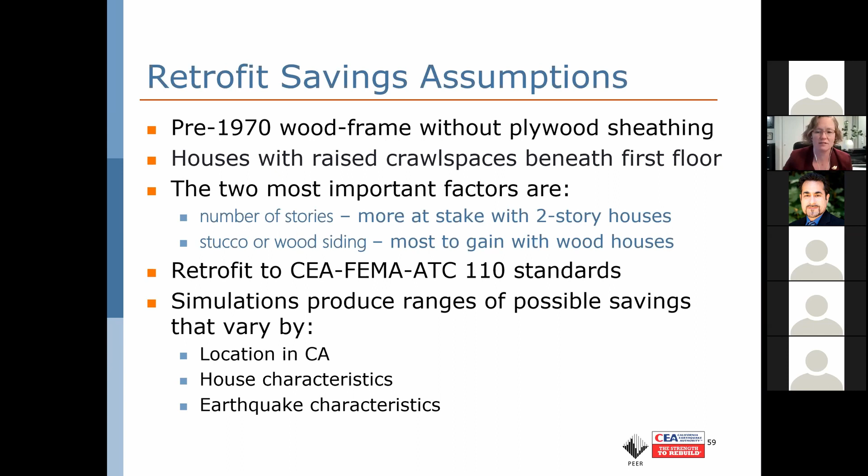So how much does a brace and bolt retrofit cost? That was actually not a part of this study, but in the over 10,000 qualifying retrofits in CEA's brace and bolt program, the average typical cost is around $3,000 to $7,000. It tends to be more expensive in Northern California than in Southern California, but using this value, we can say that the savings in post-earthquake repairs could be 8 to 14 times more than a typical retrofit cost.

So that's a pretty good cost benefit for an earthquake with an intensity of about a 10% chance of occurring in the next 30 years.

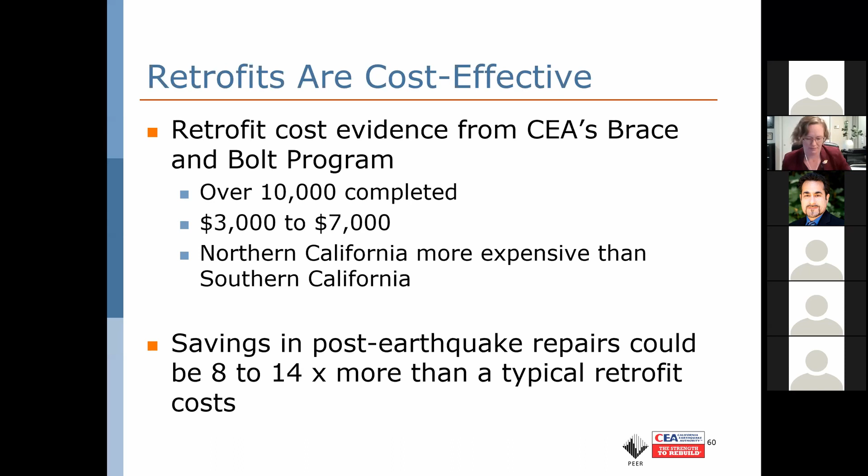It's not easy to portray or understand earthquake probabilities, how they vary over space, over what time period they're referring to, or for a homeowner to hear a number associated with retrofit savings and consider the fact that many different earthquakes can occur or not occur that affect their property over time.

In this stakeholder report, we use the UCERF3 fault movement probability map to help convey how earthquake risk varies over the state and the various locations simulated in the study. Part of the reason to show a map, a very colorful, concrete portrayal of earthquake risk...

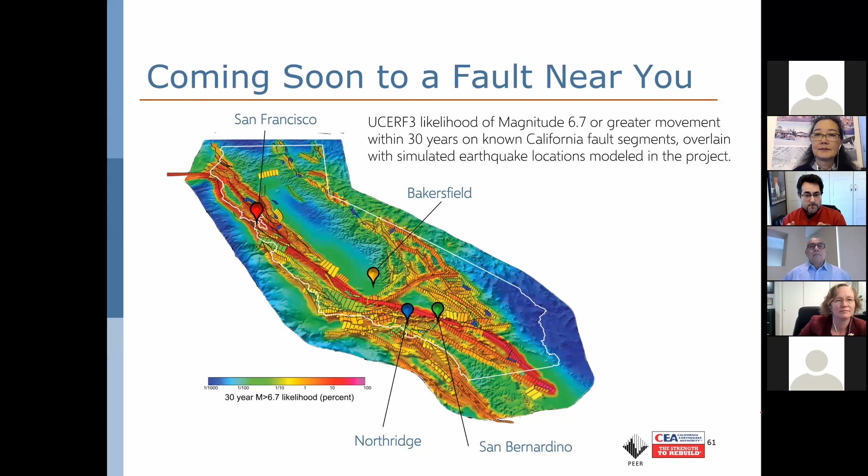Okay, so David, you make a very good point. We did specify 4 locations, as you see on the slide right here now: San Francisco, Bakersfield, Northridge, and San Bernardino. We provide the lat-longs and the soil type to the loss modelers, but only one of them was able to actually cut and paste our hazard curves for those specific sites. The other ones use their own view of the hazard at that site, and there were some differences. In our Working Group 6 report, we go into that in more detail, so you will see those differences, how much they were. That does certainly affect making a pure apples-to-apples comparison between the vulnerability functions, but that was part of the semi-blind study we created to protect everybody's IP. Hope that answers the question.

Great, thank you. Another question, maybe we can direct this to several people in our group. So many people have heard the NIBS study's estimate—NIBS is the National Institute of Building Sciences. They released a study not too long ago that says for every dollar spent on mitigation, $4 are saved, and this is particular to earthquakes. So how does that very simple message compare with the PEER CEA project results?

Evan, do you want to get us started on that? Yeah, I'm happy to answer that.

I'm very familiar with that report. I did some editing on the updated version, which shows even better results. Sharyl noted it in one of her last slides, that we see an average return of 8 to 14 times in a specific event, like a 250-year event, but even amortized over the life of the house, that 4-to-1 benefit, that $4 or thereabouts benefit, is there.